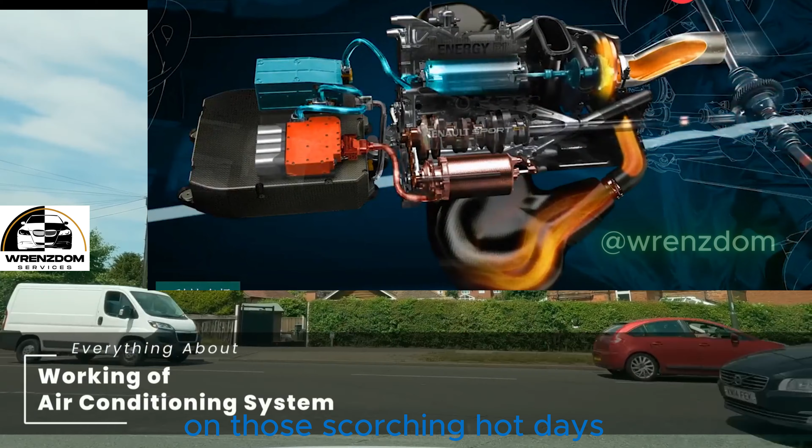How does your car's air conditioning system keep you cool on those scorching hot days? Let's take a closer look at how the car AC works.

The car AC system operates on the principles of thermodynamics and fluid mechanics. It consists of several key components working together to cool the air inside your vehicle. First, we will see the locations of all components and after that their functions.

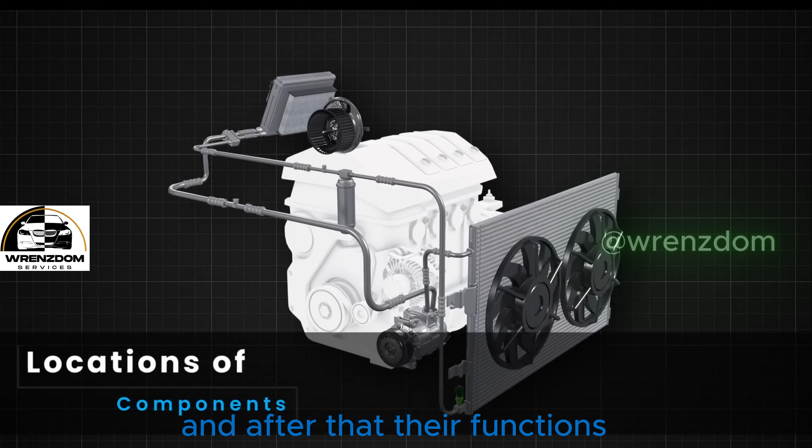The first one is the compressor. It is mounted on the engine block, usually at the front of the engine block, or mounted on brackets attached to the engine, near the radiator and condenser.

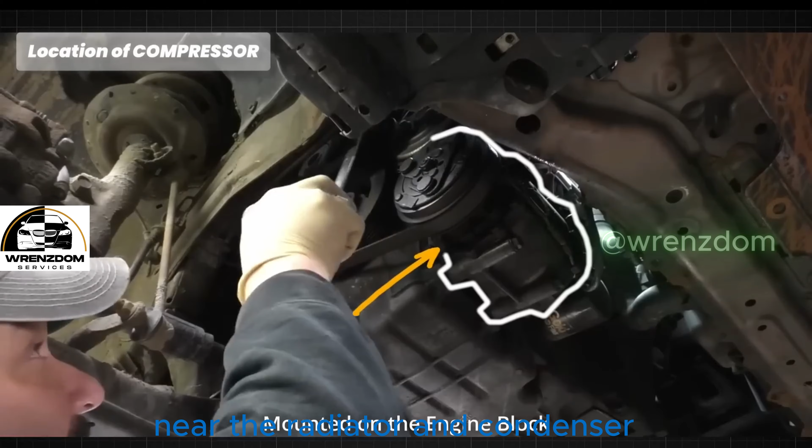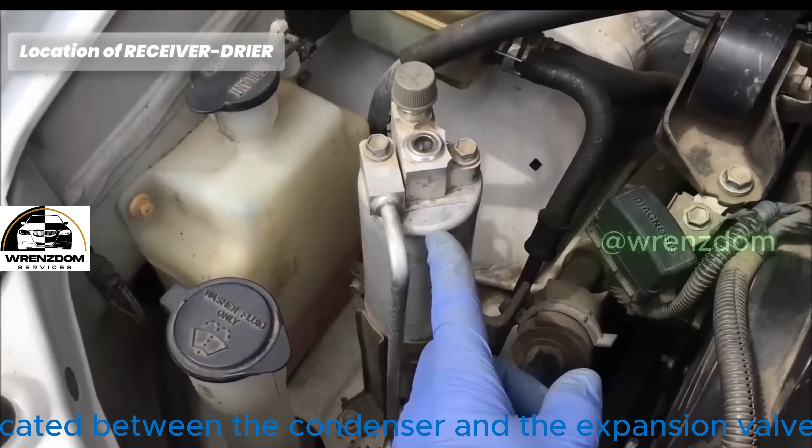Condenser coil, located in front of the vehicle's radiator, near the front grille. Receiver drier, located between the condenser and the expansion valve, often near the condenser. Expansion valve, typically located near the firewall, close to where the refrigerant lines enter the cabin.

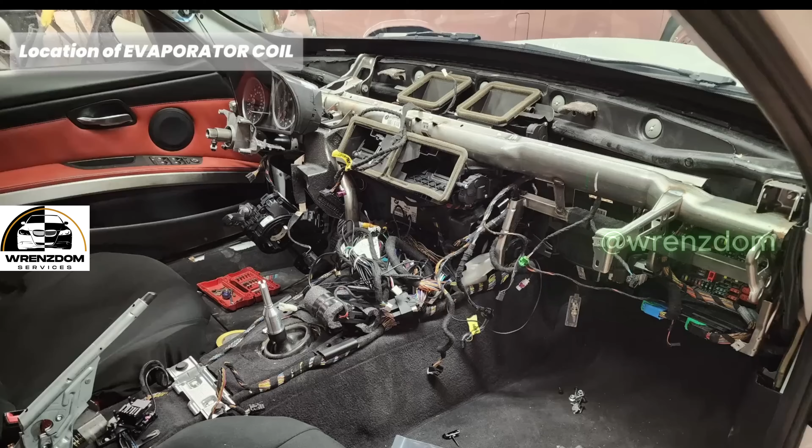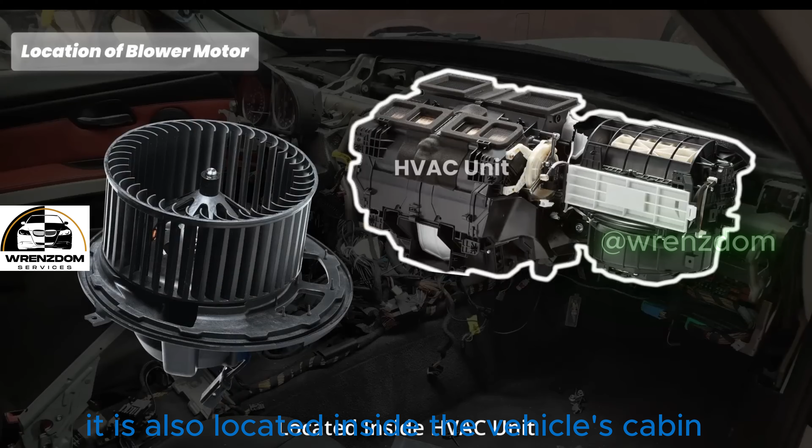Evaporator coil, inside the vehicle's cabin, typically behind the dashboard. It is housed within the HVAC unit, that is heating, ventilation, and air conditioning unit. And blower motor fan, it is also located inside the vehicle's cabin, usually within the HVAC unit, near the evaporator. And the refrigerant gas is a specialized fluid that is used to circulate inside the air conditioning system.

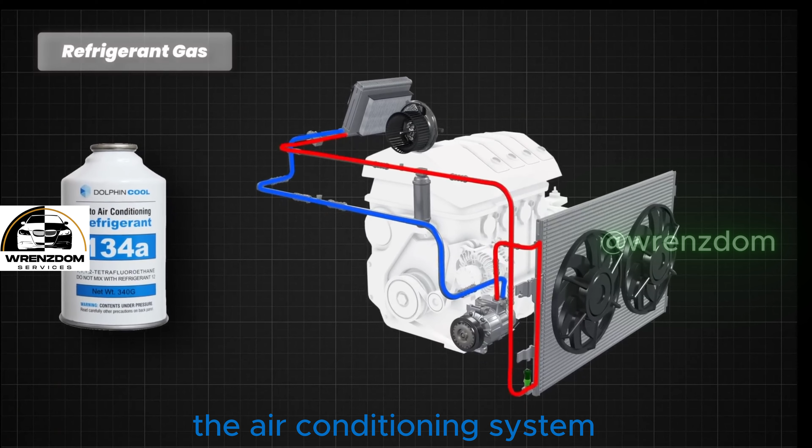Let's see how it functions together. When the AC is turned on, the climate control unit sends a signal to engage the AC compressor clutch.

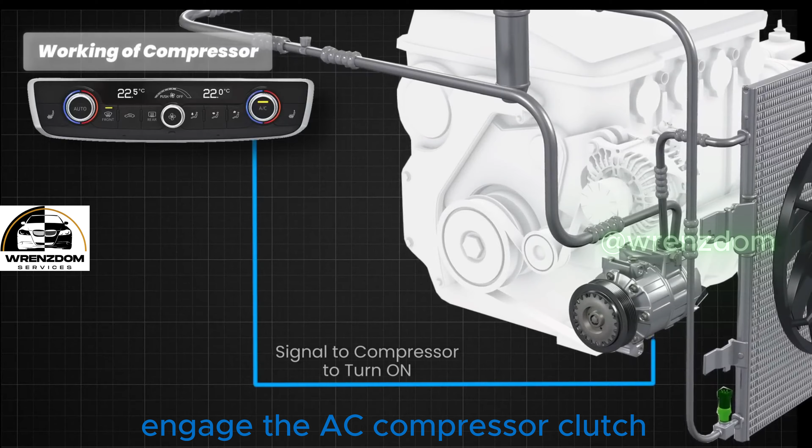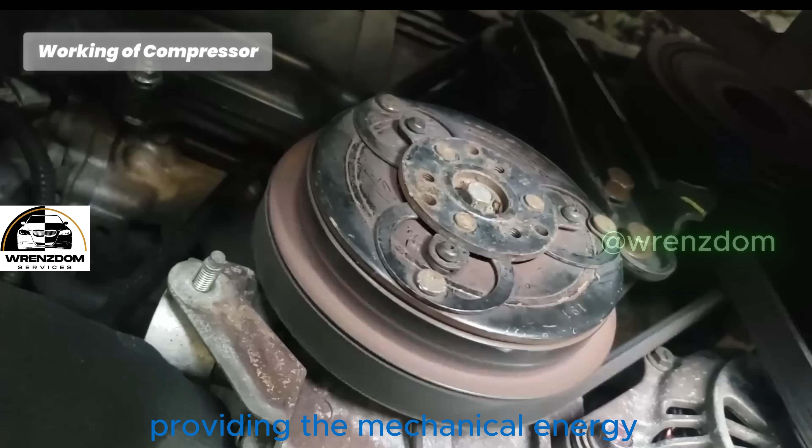The compressor is typically belt-driven, meaning it is connected to the engine's crankshaft pulley via a belt. As the engine runs, it drives the compressor, providing the mechanical energy necessary to compress the refrigerant gas. The compressor consists of one or more pistons housed inside cylinders, which compresses the refrigerant gas.

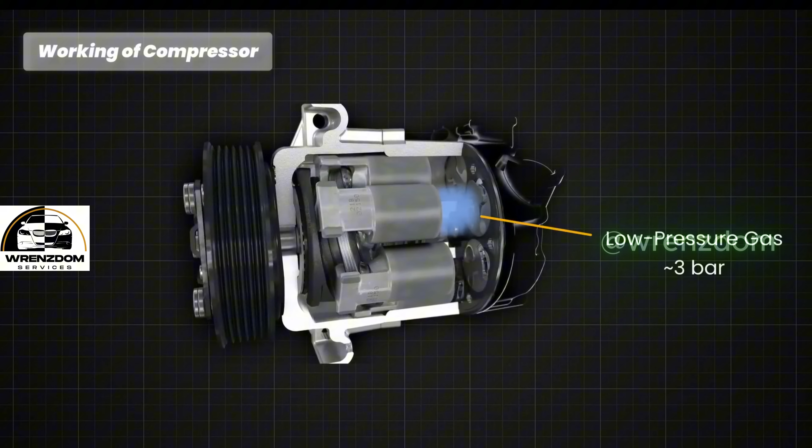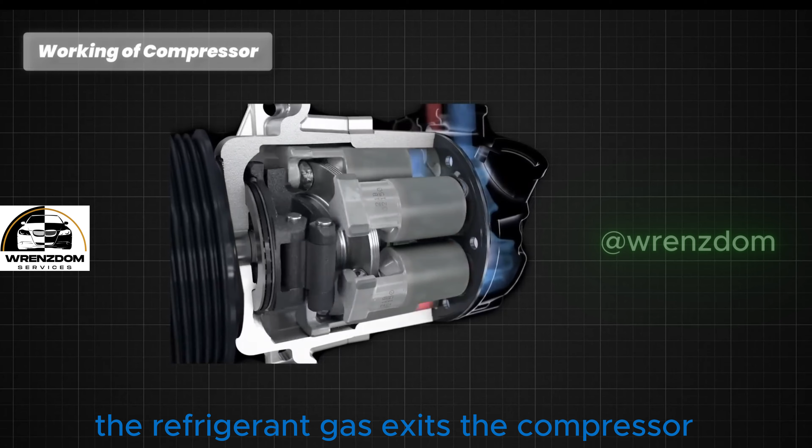The refrigerant initially enters the compressor as a low-pressure gas. This gaseous refrigerant is then compressed by the compressor, which increases its pressure and temperature significantly. After being compressed by the compressor, the refrigerant gas exits the compressor as a high-pressure, high-temperature gas.

This hot gas flows into the inlet of the condenser, which is usually located at the front of the vehicle, near the radiator to take advantage of the airflow when the car is moving.

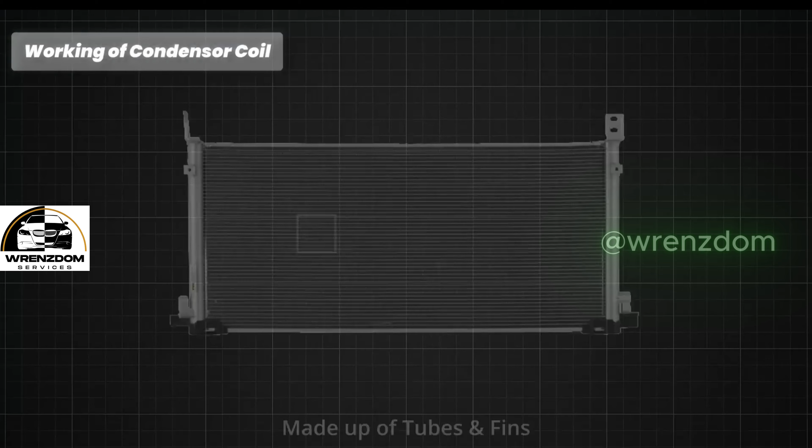The condenser is made up of a series of tubes and fins that provide a large surface area for heat exchange. As the hot refrigerant gas from the compressor flows through the condenser coils, it releases heat to the surrounding air. The condenser fan and vehicle motion ensure that sufficient air passes over the condenser to dissipate heat effectively, enhancing the cooling process.

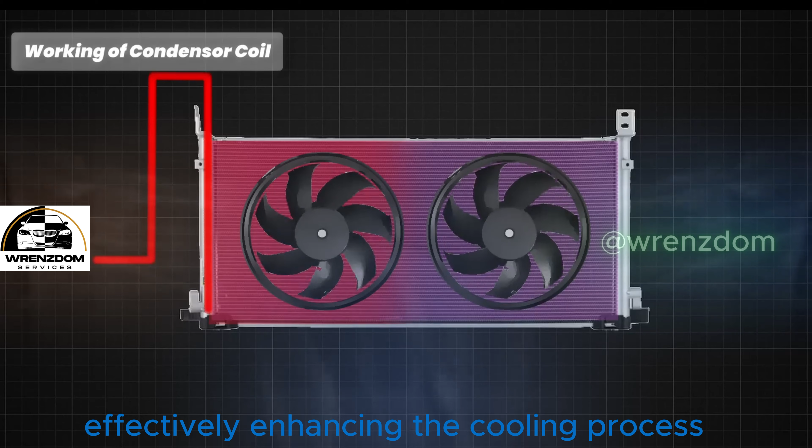As the refrigerant loses heat, it begins to change from a high-pressure gas to a high-pressure liquid. This is called phase change. This phase change occurs because the refrigerant's temperature drops below its condensation point as it releases heat.

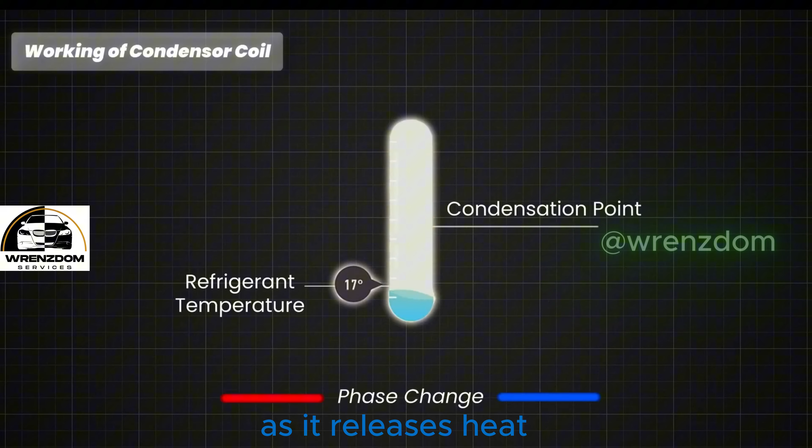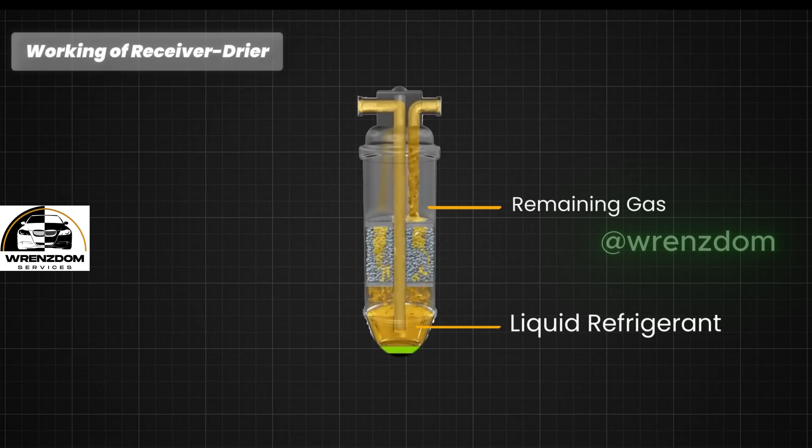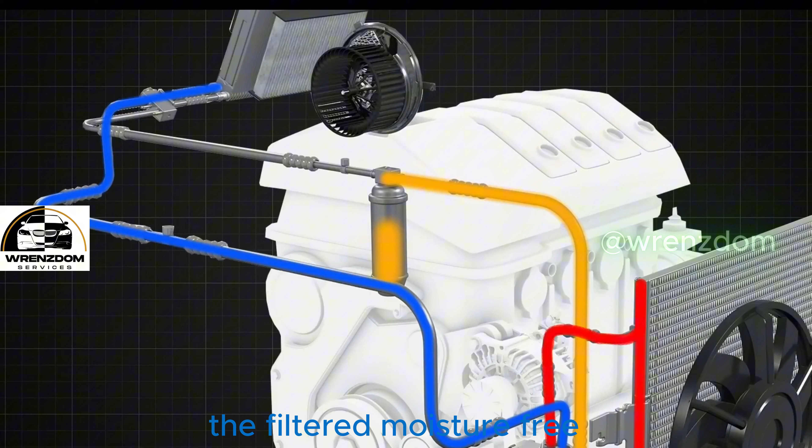The cold refrigerant is now cycled back through the receiver drier. The receiver drier helps separate any remaining gas from the liquid refrigerant. The internal structure of the receiver drier facilitates this separation, ensuring that only liquid refrigerant flows to the expansion valve. The filtered, moisture-free, and high-pressure liquid refrigerant exits the receiver drier and flows towards the expansion valve.

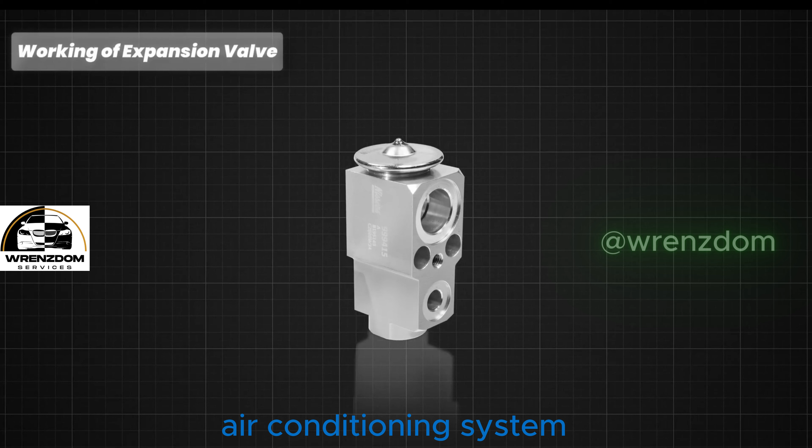The expansion valve is a vital component in a car's air conditioning system, responsible for regulating the flow of refrigerant from the high-pressure side to the low-pressure side of the system.

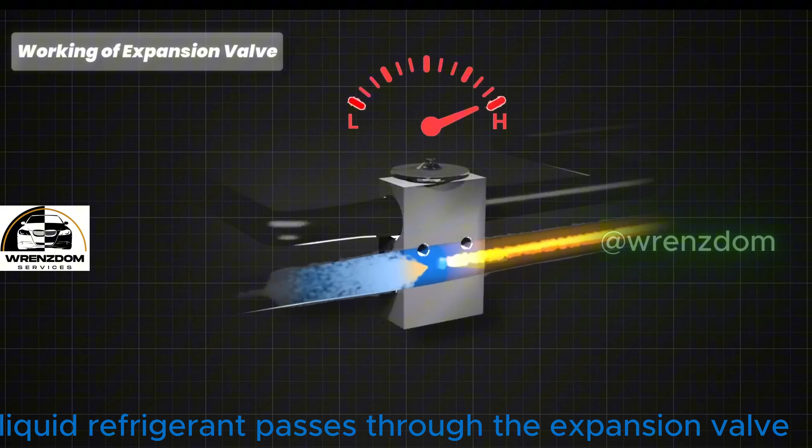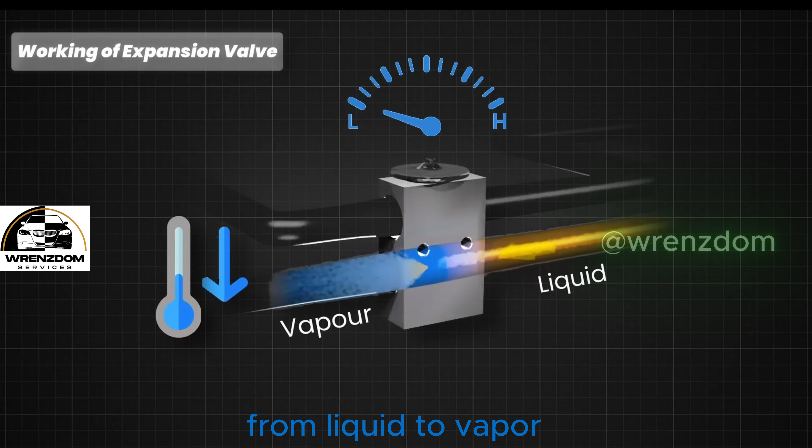When the high-pressure liquid refrigerant passes through the expansion valve, it encounters a sudden drop in pressure. This pressure drop causes a further drop in temperature, leading to a partial phase change of the refrigerant from liquid to vapor. The refrigerant exits the expansion valve as a mixture of liquid and vapor and enters the evaporator.

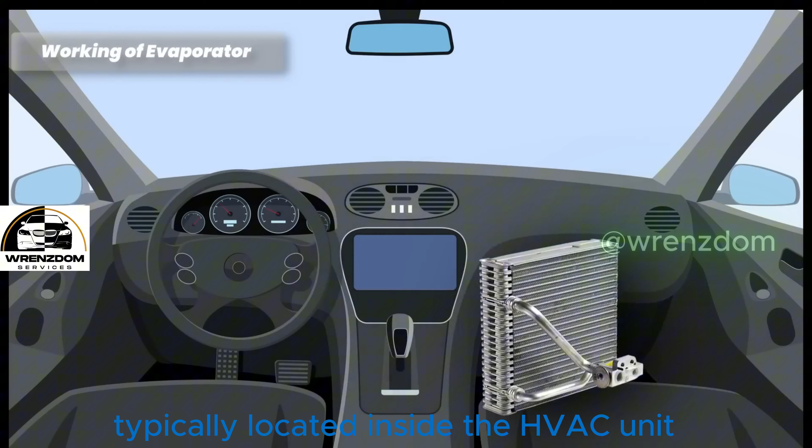The evaporator is typically located inside the HVAC unit behind the dashboard, and it is typically made of aluminum or copper.

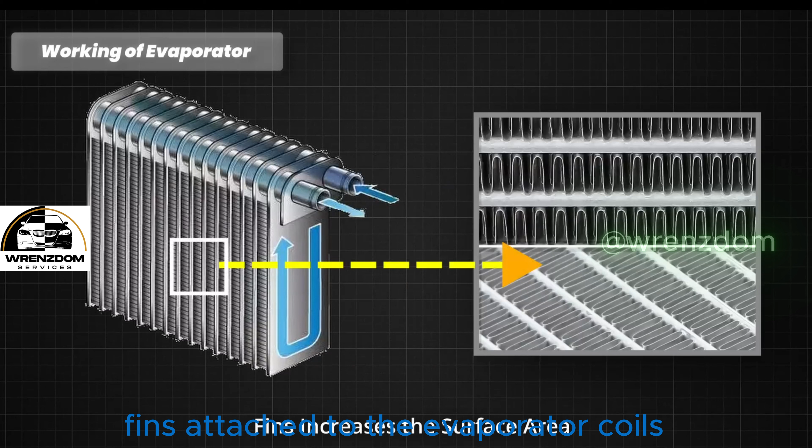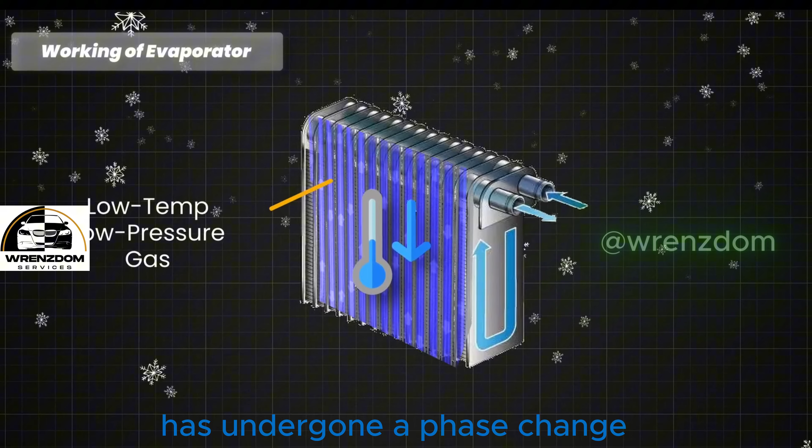These coils contain the refrigerant that absorbs heat from the air. Fins attached to the evaporator coils increase the surface area for improved heat transfer. The evaporator coils are cold because the refrigerant inside them has undergone a phase change from a high-pressure liquid to a low-pressure gas, causing a total drop in temperature.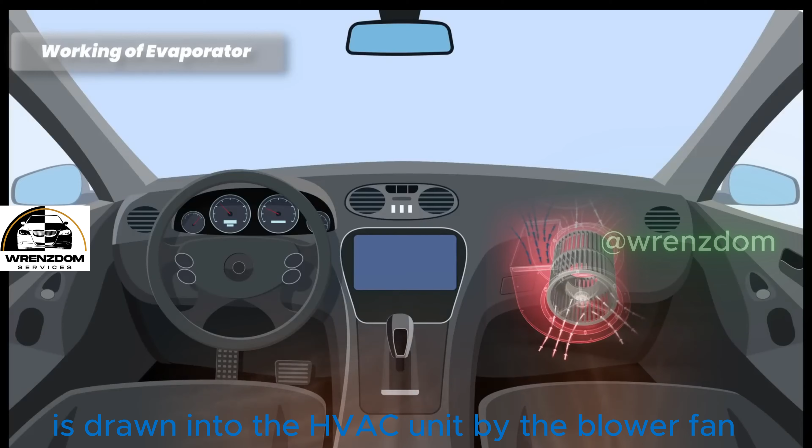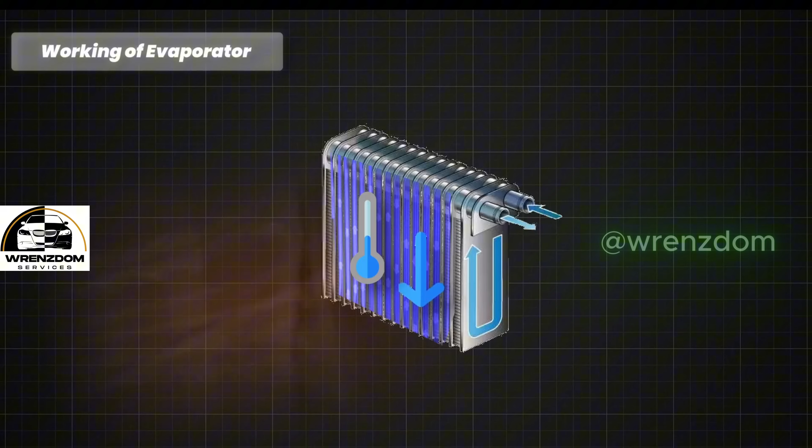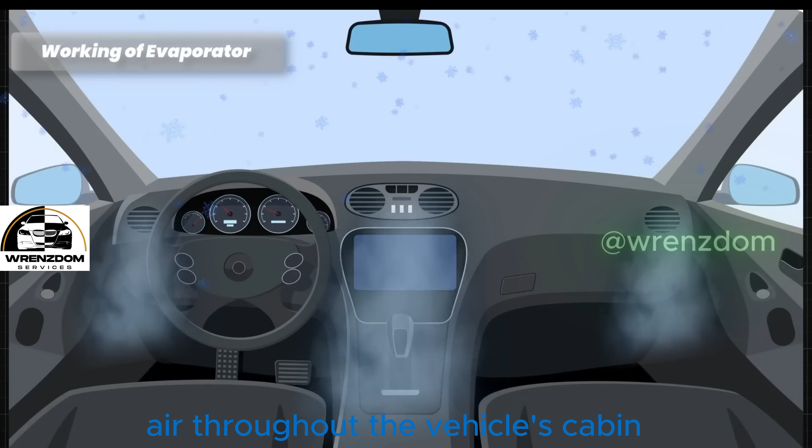Warm cabin air from the interior of the vehicle is drawn into the HVAC unit by the blower fan. As the warm cabin air passes over the evaporator coils, the refrigerant inside the coils absorbs heat from the air and makes it cooler. The now cooled air is blown out of the HVAC unit by the blower fan and circulated into the vehicle's cabin through the air vents. Air vents distribute the cooled air throughout the vehicle's cabin, providing a comfortable environment for the occupants.

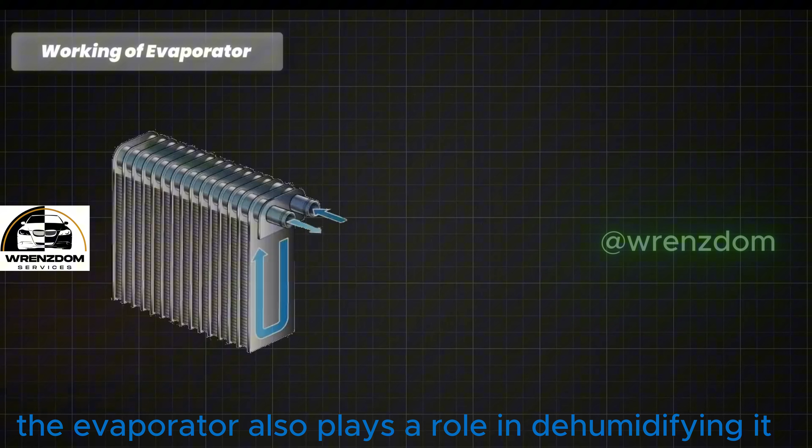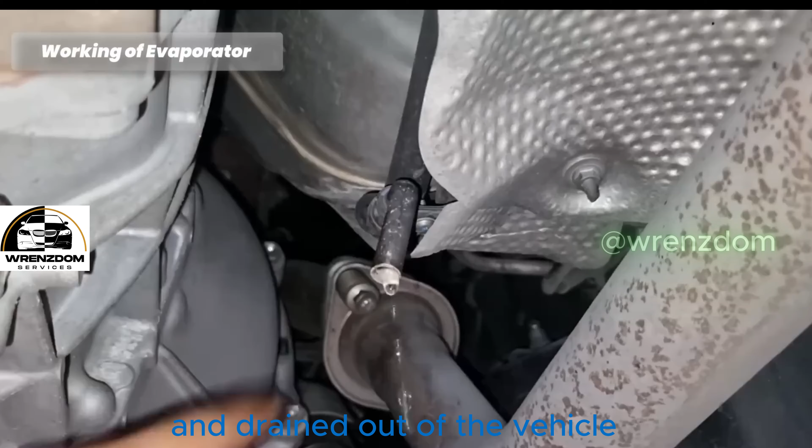In addition to cooling the air, the evaporator also plays a role in dehumidifying it. As warm air passes over the cold evaporator coils, moisture in the air condenses on the coils, forming water droplets. These water droplets are collected and drained out of the vehicle, reducing the humidity level inside the cabin and improving comfort. It ensures a comfortable, cool, and pleasant environment for the vehicle's occupants.

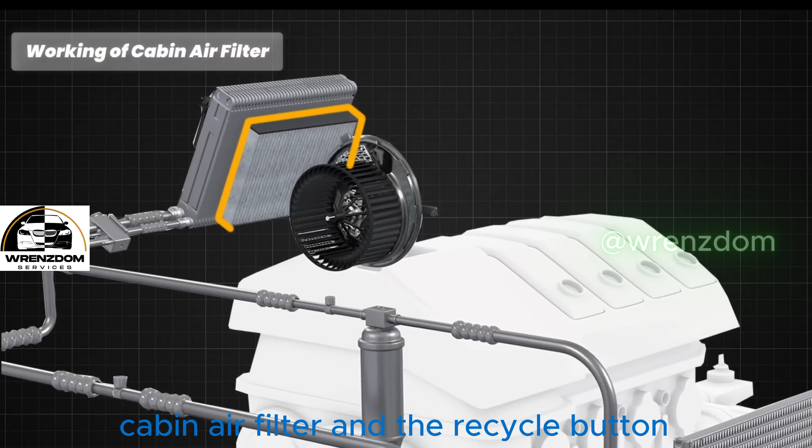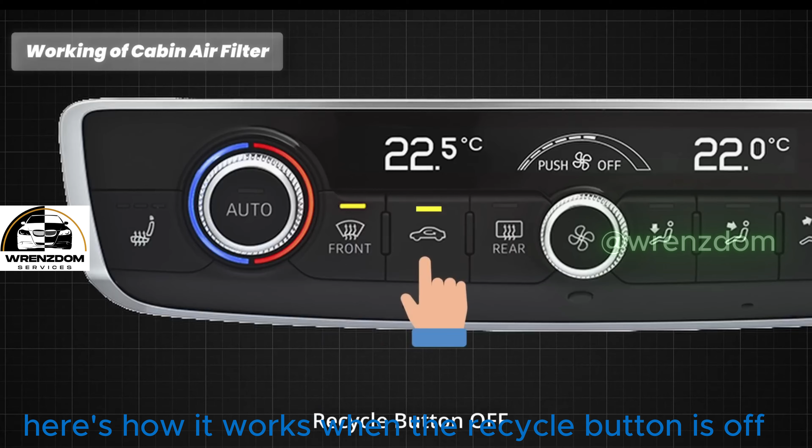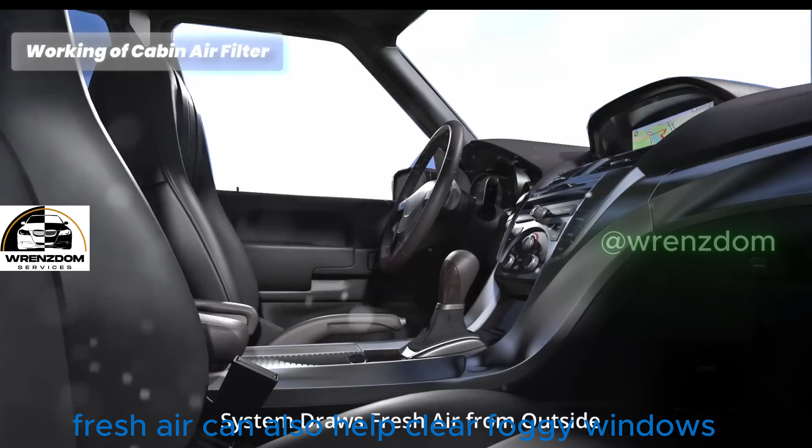Now let's talk about the AC cabin air filter and the recycle button. These components play a crucial role in ensuring you have clean air and a comfortable environment inside your vehicle. Here's how it works. When the recycle button is off, the system draws fresh air from outside. This helps to ventilate the cabin and reduce stuffiness. Fresh air can also help clear foggy windows more effectively, especially in humid conditions.

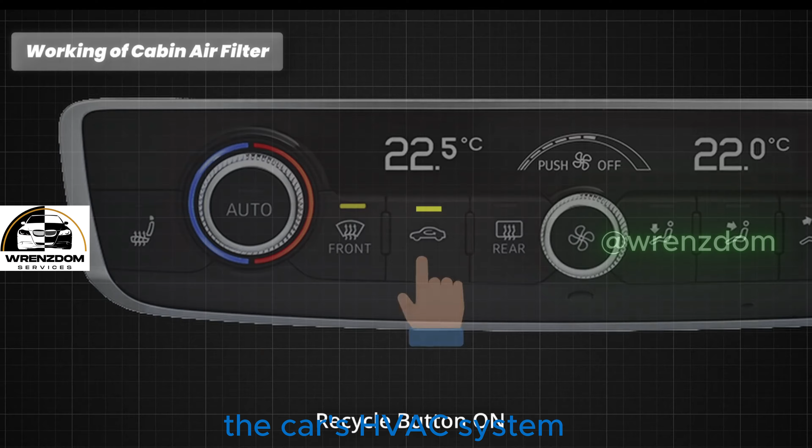When the recycle button is activated, the car's HVAC system stops the flow of air from outside and recirculates the air already inside the cabin. By recirculating the already cooled air, the AC system can cool the cabin more quickly and efficiently.

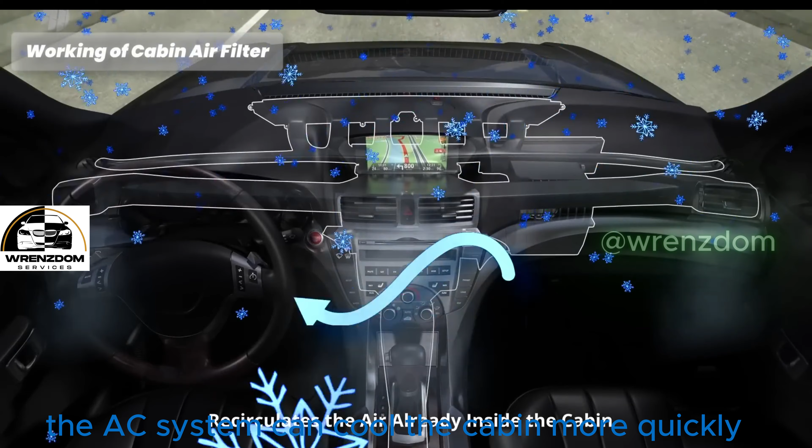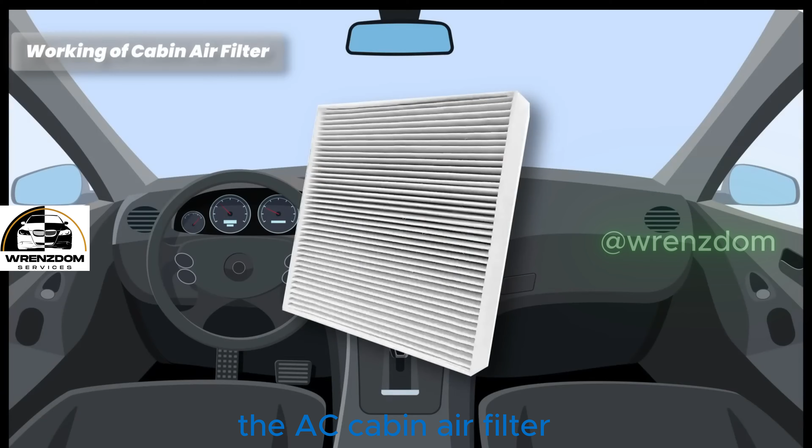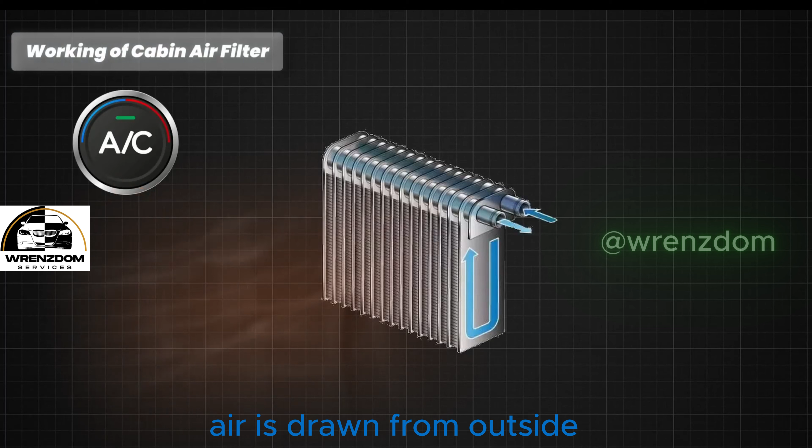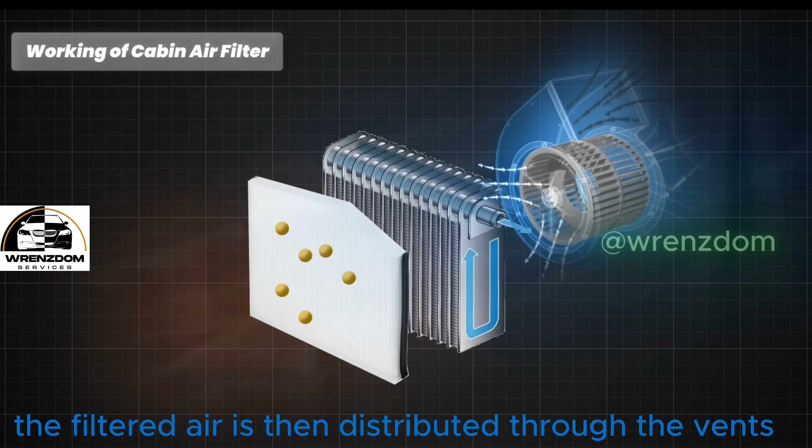In recirculation mode or fresh air mode, the air should be filtered. For this, an air filter is used. The AC cabin air filter is typically located behind the glove compartment or under the dashboard on the passenger side of the vehicle. When you turn on your car's AC, air is drawn from outside or recirculated from inside the cabin. This air passes through the cabin air filter, which captures contaminants and provides cleaner air. The filtered air is then distributed through the vents, ensuring you breathe clean air while driving.

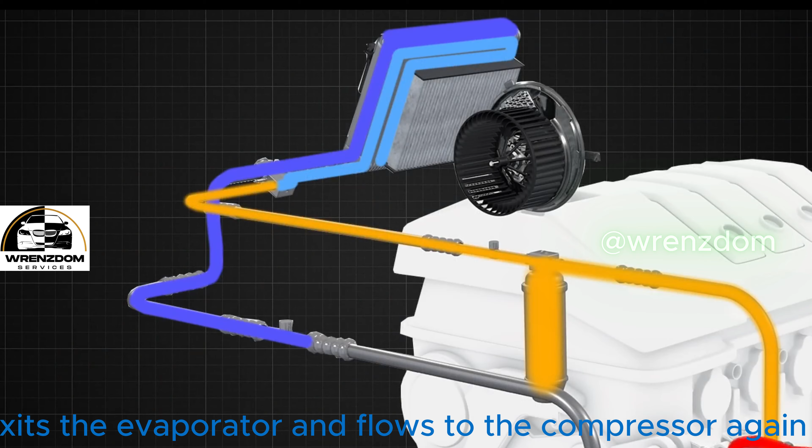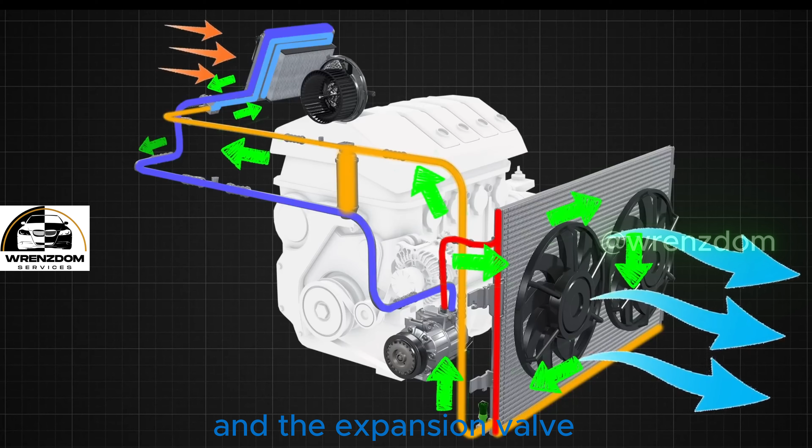The refrigerant, now in gaseous form, exits the evaporator and flows to the compressor again. The compressor receives the low-pressure gas, compresses it, and again sends it to the condenser, and the process repeats. The cycle continues as long as the AC system is turned on and the blower fan is operating, with the evaporator absorbing heat from the cabin air, the condenser releasing heat to the outside air, and the expansion valve controlling the refrigerant flow between the two. This continuous cycle allows the AC system to maintain a comfortable cabin temperature and humidity level while the vehicle is in operation.

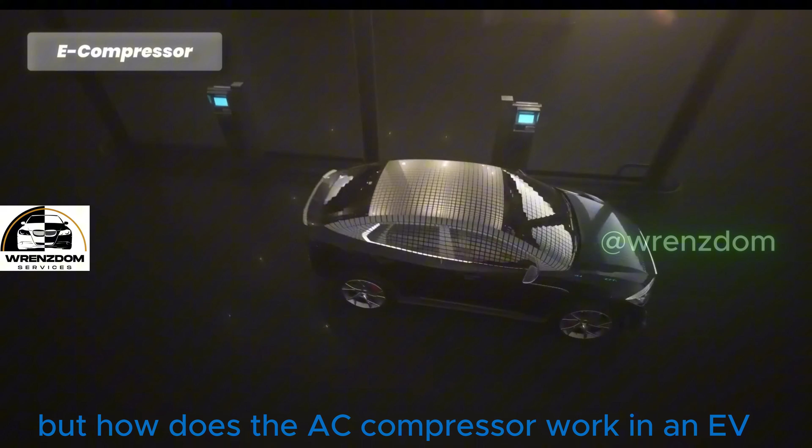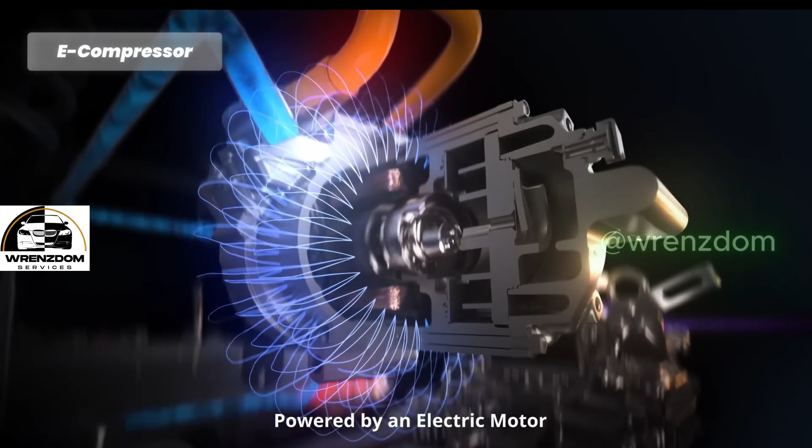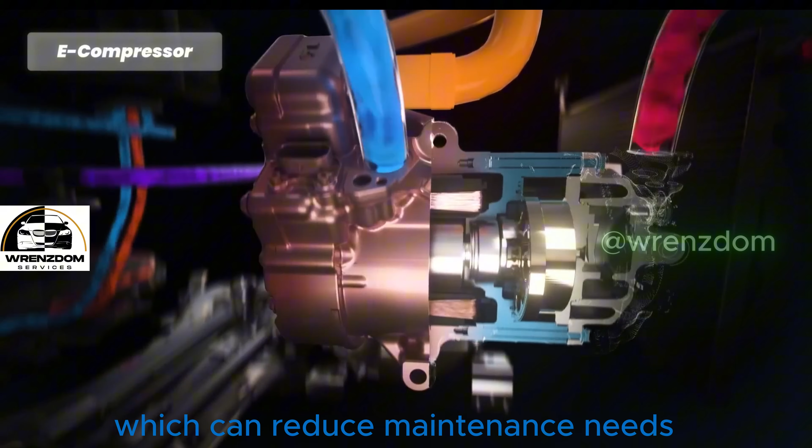But how does the AC compressor work in an EV? Let's look at how things are done in electric vehicles. In EVs, the AC compressor is powered by an electric motor. This motor is driven by the vehicle's high-voltage battery system. Electric compressors have fewer moving parts and do not rely on belts, which can reduce maintenance needs and improve reliability. In summary, while both IC and EV AC compressors achieve the same goal of cooling the vehicle's interior.

We hope this explanation has given you a better understanding of how your vehicle's AC keeps you cool and comfortable, even on the hottest days.